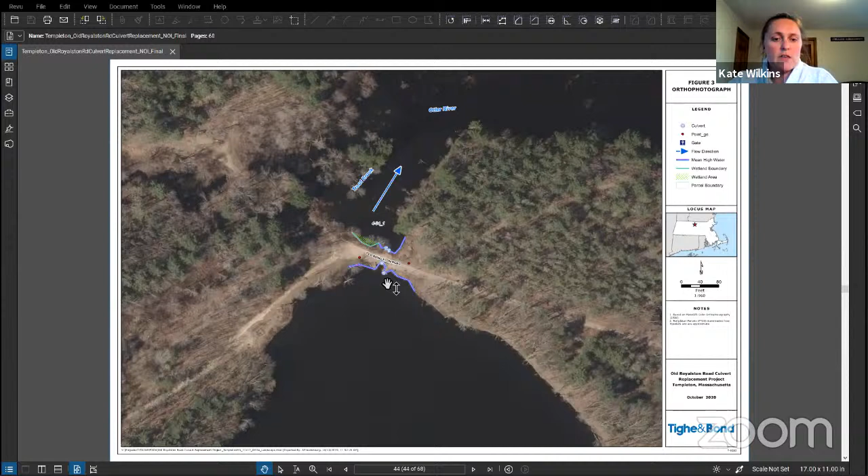We recently submitted an update to the WPA form to Lori. Some calculations were redone because we had to submit a PCN to the Army Corps of Engineers for the culvert replacement, and they asked us to rework some numbers. There was an increase in impacts to land underwater by about 1,200 to 1,300 square feet, addressing grading changes and temporary versus permanent impacts. We forwarded the updated WPA form along with a plan set showing the breakdown of everything. Okay, great, I'm glad everybody got that.

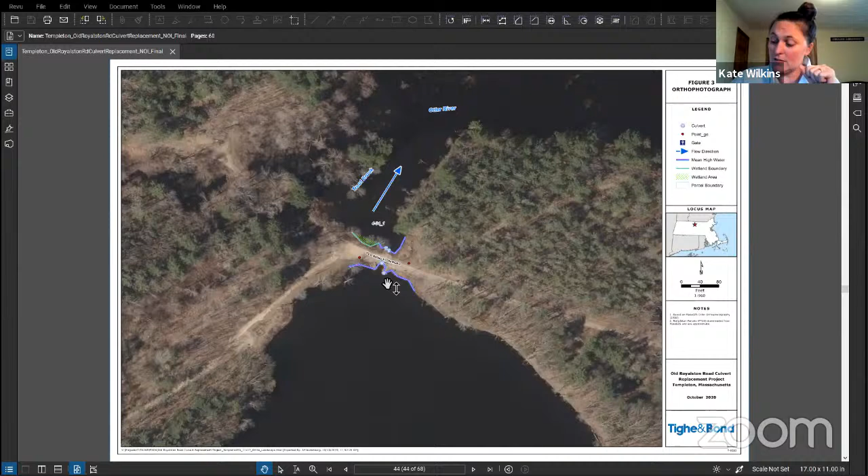As for the installation, we're going to be using cofferdams along the upland or upstream portion as well as the downstream portion to isolate the work area, so it can be dewatered. This should help show the proposed work area.

We're going to install a pump that goes from one side to the other. Dewatering will take place outside the work area into the stream, so we'll be pumping clean water to clean water. If anything is pumped from the work area, it goes into a dewatering basin, usually a filter bag lined straw bale corral. Water gets discharged there and is allowed to flow through the filter bag back to the stream channel. These are standard dewatering practices to keep the work area dry during the replacement.

This area, from 1A7 to 1A6 to 1A5, is the existing condition of where the bank is. We're going to fill in a portion of that while creating another portion of land underwater, which takes some adjusting to move the 2-pipe culvert to a single crossing structure. The flood spillway will be on this section to the west side.

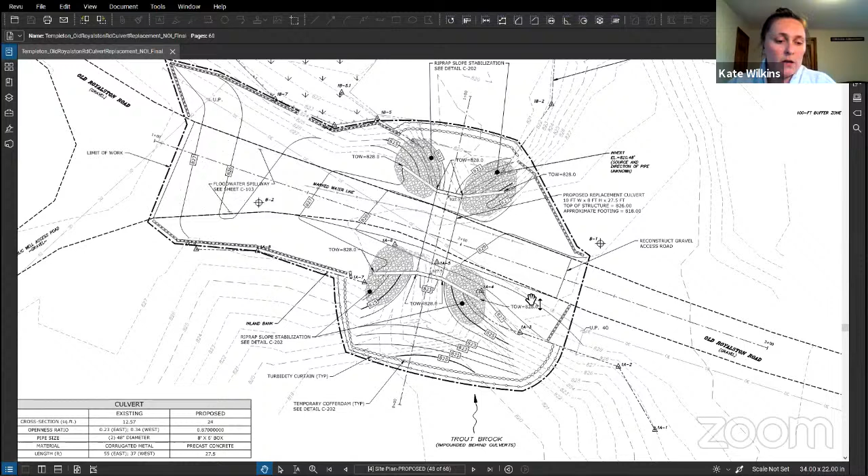Dan, is there anything else you want to add to the overall discussion on the project? I'd say generally you covered it pretty well, Katie.

One additional thing: the hatches, circled like the riprap hatch area right here, there are four of them. We're planning to protect the wing walls because this will focus a lot of the water through this culvert. The worst case scenario is after the area floods in spring and starts receding, going through the culvert with high velocities. So we're proposing riprap to protect the head walls and culvert in general. We tried to minimize its use, but want to make sure no additional erosion occurs, similar to what's happening today.

That spillway on the left side of the screen was set at roughly the same elevation as the top of the culvert, so during flood conditions water will go over the roadway in one focused area, instead of washing out a large area like it currently does. We'll put extra riprap there to protect it more than currently, and once it reaches the spillway elevation it should start flowing into the culvert since that's set at the same elevation, slowly transferring flow and minimizing erosion on the road.

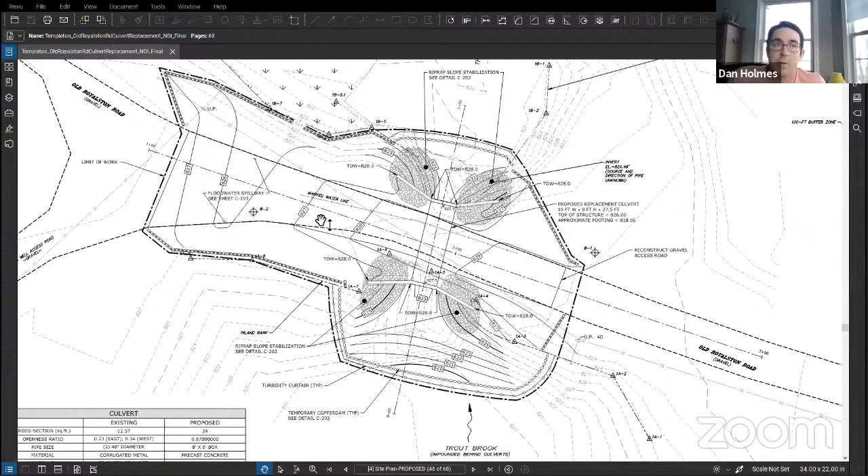Okay, did you have an idea on the size of riprap? Yeah, we're going to go with a large stone riprap. Mass DOT has a bunch of different classifications of riprap styles. This is going to be what we call, I think it's actually either riprap or dumped riprap.

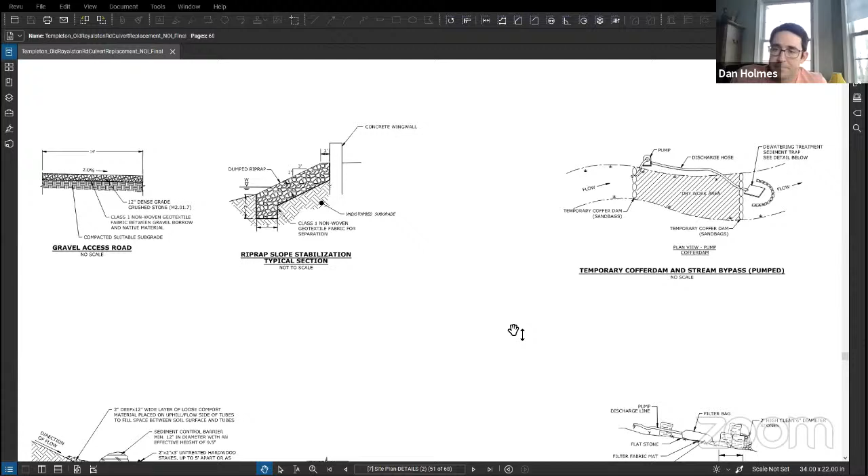So, what does that say? Yeah, that's dumped riprap. If I recall, that's anywhere from like a 2-foot diameter boulder and then some smaller gradation, 12, maybe with a minimum size of roughly 6 inch. So it's going to be larger size stone. Okay, that's really good. That's all my questions.

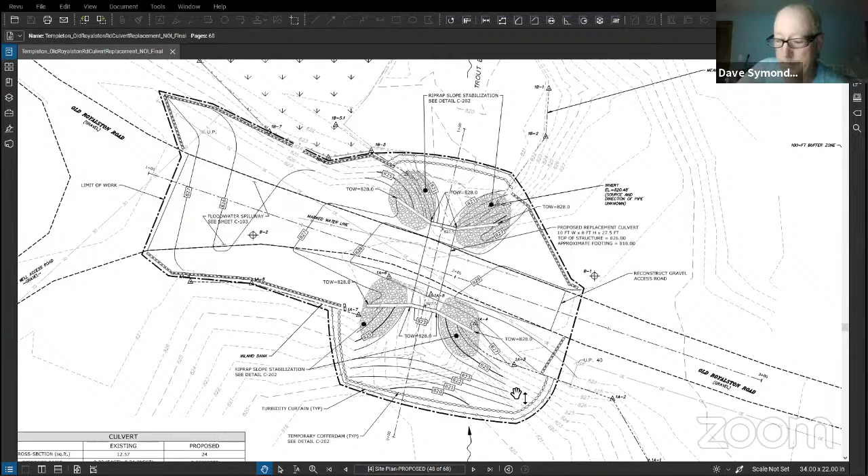Anything else, Amanda? No, I'm good. Are you ready to entertain a motion? I make a motion to approve the notice of intent. I'll second the motion. All in favor? Aye. So moved.

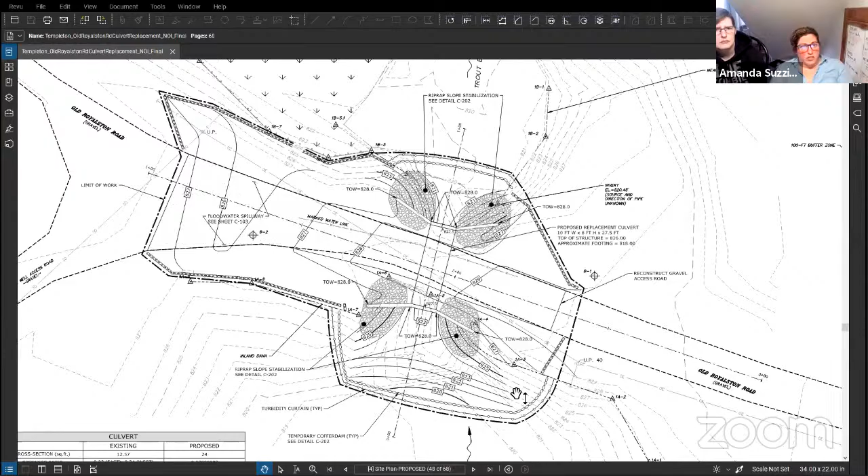We need to move the approving of the minutes. I guess we don't need to move it. George was just closing the hearing. Yes, I'm closing the hearing for this particular one. We said all those in favor, everybody said okay, so that's the hearing for Royalston Road now officially closed for this evening at 6:16 p.m., although we already said we're in favor. So now we can move on to our next bit of business.